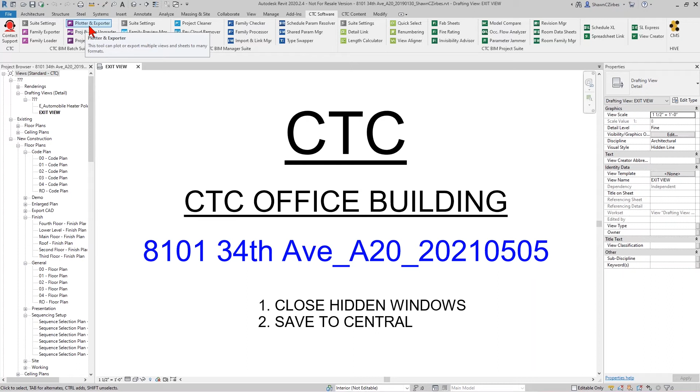With the Plotter and Exporter, when you click on it, I happen to be in a Revit project model where I want to be doing some printing. The Plotter Exporter is going to open and initialize. It'll provide me a list of all of the views, all of the sheets. Here's the sheets, a breakdown of all the views from the project. It also loads up the wildcard search library. Now, my wildcard search library is actually empty right now.

Oddly enough, over here to the right, I actually have wildcards in my export list that do not appear in my wildcard search library. And this is an important note. You do not have to distribute the wildcards themselves as individual files to your team if you're setting this up for batch use across your office. You can simply save a configured settings file, and those wildcards get saved within.

Now, I will go through the exercise of making a wildcard today so you can see how this is put together, how you can set this up, and why I set it up the way that I do. But you don't have to do that on everybody's computer or distribute them to everybody's computer.

That's an important note because it makes it a lot easier then to leverage these settings when you only have one configuration that you can share on your network. Okay. Within here, let me just start brand new. Let me start from scratch. So brand new settings, there's nothing configured over here at all. We're going to go completely from scratch.

We're going to talk about the interface of Plotter Exporter. On the left, this is asking me what it is I want to include in a print or an export of some sort. This is either views or sheets in my current project. The same list that's over here can appear right in through here, right? It doesn't exactly organize the same, but it's the same views, the same list. Or I can use the wildcards again, and we'll get to that in just a minute.

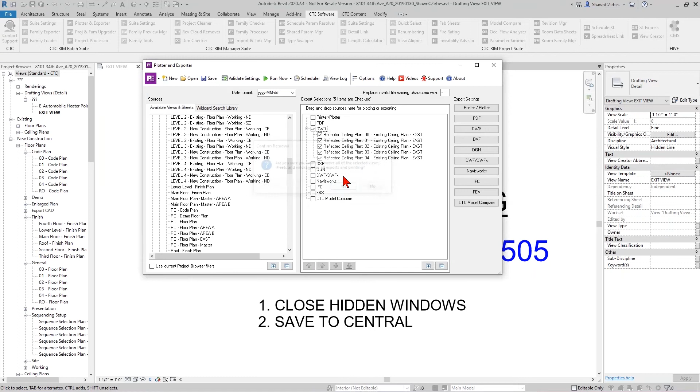So we're going to introduce the concept of wildcards now. Let me remove all of this because I don't want manual sheets in here, and I don't want manual views in here either. So I'm just going to remove all the selected items, and we're going to go over here to the wildcard search library. Wildcard searches are broken down very similar to how views and sheets are, based on view type or all views, based on sheet type or all sheets. Well, in this case, all sheets is basically what's there.

What I'm going to do is I'm going to start by creating a selection set of some specific views. I happen to know within my project standards that I have a view template that I use on a number of different views, and that view template has export CAD as a part of its name, a property that gets applied to my views. And I'm going to use that here to export any and all views that somehow relate to export CAD, because I might have 3D views, 2D views, elevations or RCPs or you name it. So I'm going to add to this list a new wildcard.

And for the search, I'm going to search for everything. And I'm going to give it some kind of a name. So the little asterisk here is everything. It's wildcard search. And that's typically what I do. I find everything. I don't really care about the view names or the sheet names. I just want everything that's specifically a view in this case. And I'm going to tell it what I want to call this. I'm going to say CAD, we'll capitalize that, exports.

You could put some other name on here if you wanted specific view types, but I'm going to look at all view types and all disciplines. If you did have the intent of using this specifically for just architecture views or just mechanical views or structure, you name it, you can do that. But I'm going to do all views of all view types. My view types would be things like 3D or floor plan or whatever. Okay. You can also choose to include views with this wildcard that specifically have certain revision cloud numbers associated to it, or maybe just the highest revision cloud.

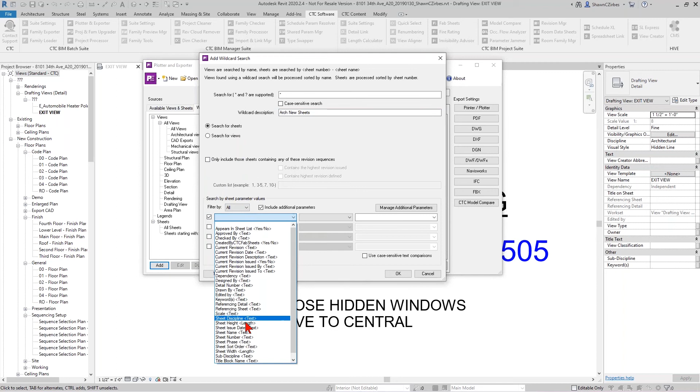Let's go find sheet discipline. Sheet discipline. Here we go. That's a custom parameter, again, that I added, and I fill that out for my sheets. And if that equals specifically architectural or architecture, when I test this, I should find that all of my architecture sheets have that discipline on there.

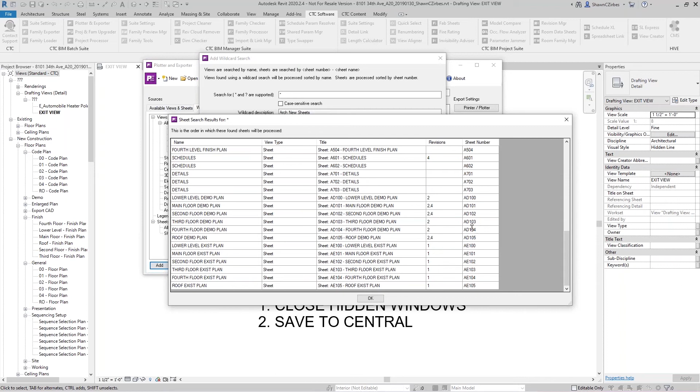Now, here's a problem. I have some demo sheets and some existing sheets as well, because this is an existing building with some demolition and then a bunch of new construction. And I don't want the architectural demo and architectural existing sheets in this set. Notice this is architectural new sheets specifically. So what I'm going to do is add another filter. I have a parameter called sheet phase. Again, another custom parameter that I've made in my project. You can certainly use your own for yours.

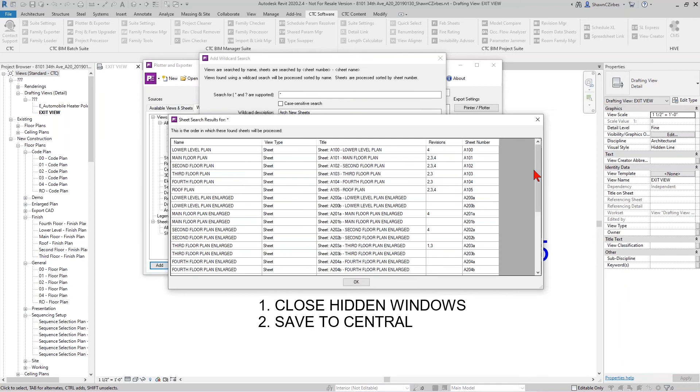I'm going to set this up to equals new, and then retest my export and just double check what's going on here. You'll notice this is just now the A sheets, just the A sheets. That's all I really wanted. And so I can okay this, and I can use this again over here for one of my exports. I could have a PDF dump of just the architectural new sheets if that's what I specifically wanted in my export.

Now the reason why I do that, Arch New Sheets, is because of the next little area. Inside of Plotter Exporter, you have some export settings over here. Each of the individual kinds of exports can be configured for exactly how you want them to export.

In the case of PDFs, I want to use, where is it here? I have to get my PDF printers real quick. Give this a minute to look for just PDF printers. Probably will have the native Windows PDF export. I'll have the CTC PDF writer. You might have Bluebeam or Adobe, you name it. Any PDF printer will be used here as long as the output file format of that printer is PDF. It'll show up in this list.

So I'm going to use the CTC PDF writer. I like how it prints. I'm also going to use print settings that exist in my project. Make sure that your print settings do relate to the printer that you've chosen, in this case, the PDF printer. And I'm going to go ahead and use architectural, I believe, D-size sheets in this project.

I can tell this exactly where to go. And I can use relative project directories if I need to. If these projects are stored on my network, I can certainly use that relative project folder to save this into a particular directory. So let me just browse to where this particular file is real quick here. The one that I have open is in my little demo folder.

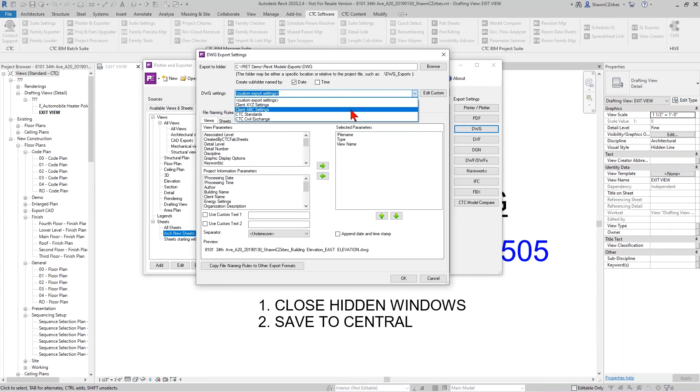Similarly, my DWG configuration, I can do something very similar. I'm going to browse out to my DWGs folder right here. Again, you can see I've done some exports in the past. Again, I want a dated subfolder. I can use specific DWG settings out of my project, or I can use custom export settings and edit those, similar to what I would do for Revit inherently. But if I've got certain settings that I want to use on a project or a couple of different projects, I can leverage that.

I also, again, have naming conventions. And for the views, that's the part that I really care about, since what I'm really exporting is views with CAD exports tagged. I don't really care about my sheets. Those are not going to DWG. Those are going to PDF. So I'm going to do just view naming conventions here. I'm going to pull everything out and then re-add stuff back in.

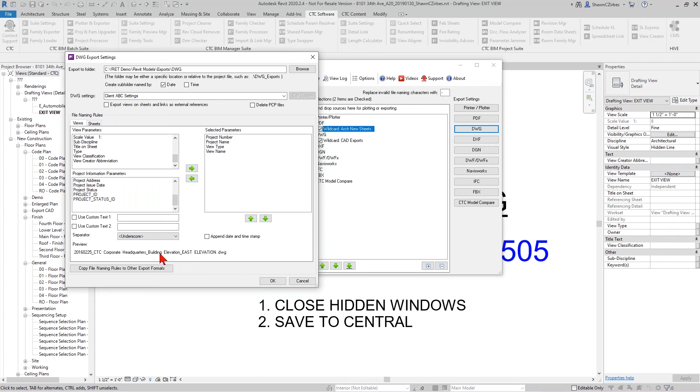So similar naming convention to my sheets. I'm going to use the project number, the project name, and perhaps from the view's properties, the view type. Yep, that's going to work. And I also want to use probably the view name. So project number, project name, view type, view name. You're going to see a little example down here. Building elevation, that's the east elevation. I could probably skip the actual view type and just use the name, but I like to include that. That's my personal choice. You can obviously set it up however you like.

And I have the option, if I want to here, of including the processing date. But since most of my consultants outside of my firm will be using these as X references, I probably don't want to include this because my name would change every single time. What I will do is keep it in a dated subfolder, as I mentioned, and that way I know what version it is and I can send that out. If you really want to put the date and or timestamp on, feel free. That's obviously a property that you can leverage.

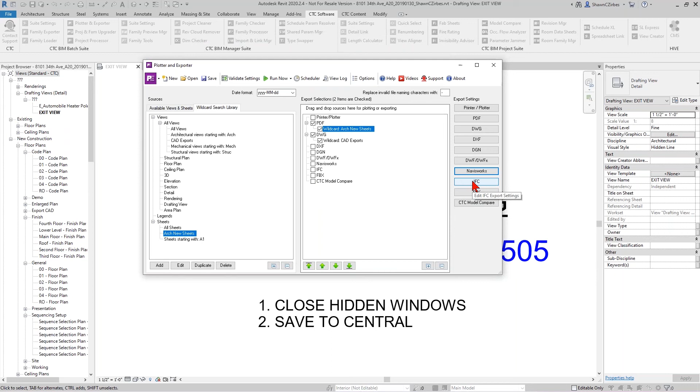So I've got my PDF and DWG settings. I'm not going to worry about any of the others. They're all very similar in how they're configured. The real difference is what do you want to export, how specifically do you want to name it, and what specific settings do you want. If I was doing Navisworks, I would have specific Navisworks settings here. If I'm doing IFC, it's IFC specific settings, right? So you have the settings that are related directly to that export type.

Ultimately, if this was all set up, I can hit run now, and it would run on my active project, my current project. Or if I had multiple projects open, I can select specific open projects and have it run on each of those. So in an on-demand method, I can just go ahead and run this whenever I need.

Now, I want to show you one more thing about this export setup. I'm going to open up some saved settings, which, by the way, you can do. You can save your settings out to whatever destination you want. In my case, I've got them in my little centralized location here for Plotter and Exporter. And I'm going to use my architectural structural print settings here.

So you can see I've got PDFs in the list, DWGs in the list. The CAD export views is very much the same as what you saw before. If I edit this one, you'll notice that it's view type export CAD, right? It's exactly the same settings we showed just a moment ago. And then my individual PDF exports here, you can see architectural existing, demo, new.

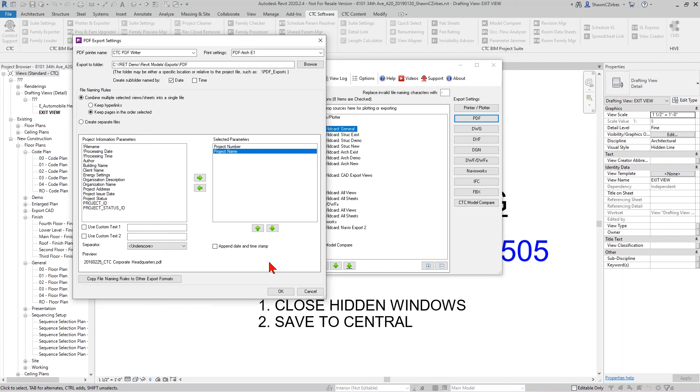I put them as 3 separate selections here, and structural exist, demo new, same thing. And then my general sheet is first. And that is because in my PDF, I want to combine this together, keeping the pages in the order that I've selected, which is exactly this order here. And within each of those selection sets, it'll alphanumerically sort those sheets, and I'm naming it by project number and project name. So it's exactly the same settings that you saw me configure just a moment ago.

So if I was to click Run Now, right now, on this active project, it would take it about probably, I don't know, 60 seconds to about 2 minutes to actually complete this full print, and it would dump the PDFs and the DWGs out, and I wouldn't have to babysit or watch that. And that's all well and good. But here's the deal. You don't want to watch that happen, so I'm not going to actually click Run Now right now. Maybe I'll do it later during the Q&A session. We can let this thing run. But that is certainly a way of running it.

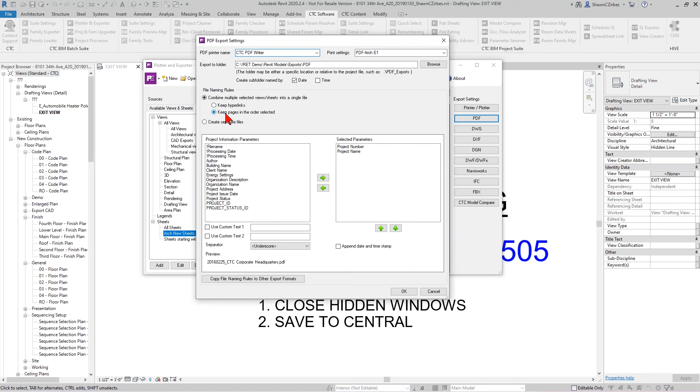The other way of running it is by using a scheduler. And this is where this tool becomes incredibly powerful. If every Friday I know that I want to print this for a collection of projects, I can set this up to do exactly that. With the scheduler, the one thing that you absolutely have to have is you have to have saved your settings someplace. In my case, I've got an architectural structural print set, and it will do exactly these settings and know what those export settings are supposed to be. I'm just going to resave this to make sure it's using exactly what I want. So it is, good. And that's just because I made a change quickly to the PDF settings. It was set to create separate files, and I wanted it to be in a single file with my pages in the right order.

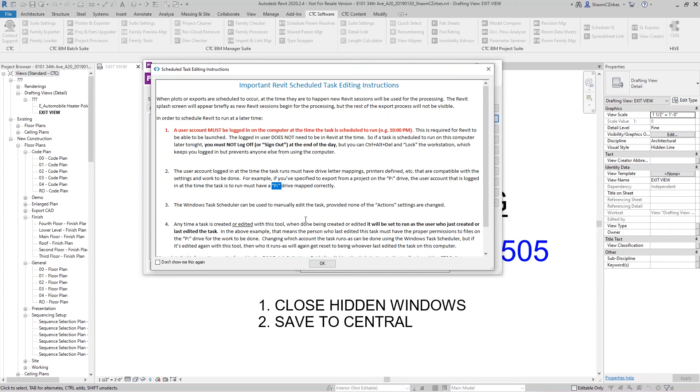So if I jump into Scheduler, there's a couple of other caveats to this. This must be run on a computer with Revit, and it must be logged in. The computer can be locked, but it must be logged in. So you don't sign out at the end of the day. The user that is logged in must have privileges and drive letter mappings and the printers defined from your settings file. That's kind of an important thing. So if you're using a P drive, for example, or an R drive, that must exist and the path of the models must be correct. And we're basically leveraging Windows Task Scheduler for this little step.

So I'm going to delete the one that's here right now, and we're going to set up a brand new one. Create a new one, a new print set. This scheduled task is going to be called Webinar Print or Webinar Export. And I'm going to put CTC at the beginning of that because I like to prefix things with my corporate initials so I know that I set this up. It's a CTC specific export for me. I can schedule this to run weekly, every Friday, perhaps. And maybe I want this to run at 6 p.m. I like using 24-hour time, so 1800 Central in this case.

If I was working in other time zones, I would need to make sure that I synchronize this to whatever the time zone is, since I'm running this on my computer, which currently is 12:22 Central time. So if I wanted this to run 6 o'clock Pacific, I'd probably put in here 1900. Sorry, Pacific, that'd be 8 o'clock, 20. This is using 24-hour time because that's my system settings. You can have yours set up however you like. It's going to start to run this then on Friday.

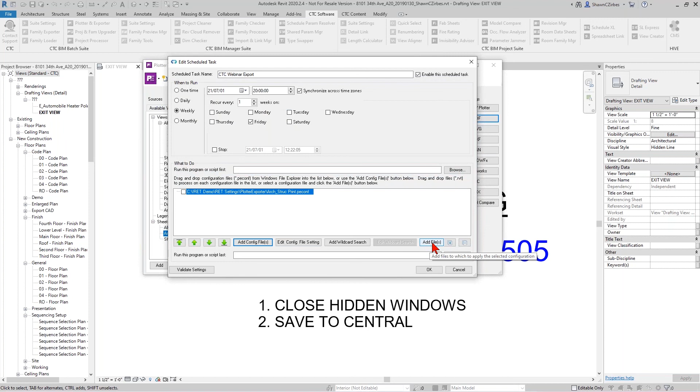And what I do is I add here a configuration file. That's that saved setting that I just saved out. Architectural structural print is the one that I was using a moment ago that had my settings in it that I wanted. So I'm going to add that to my list. I can click OK to that. And then I can add some files to that print set. So if I have, say, a couple of project models here at my fingertips and I want to add them in, I can do that.

And this tool is actually pretty powerful because it's actually version agnostic to a degree. So if I've got an architectural 2020 model and a 2021 model, and I want them both to use the same settings, these probably would be from different projects. In my case, I have a large demo set from a single project. But if you did have multiple versions at play here, that's okay. Because when this thing runs in an automated fashion, it will open up the correct version for the model. In this case, 2020 Revit or 2021 Revit.

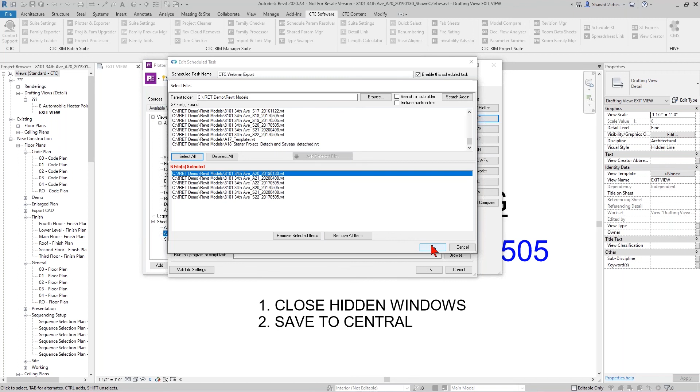And I can have other disciplines at play as well. So if I wanted my structural prints, since this is an architectural structural print set, I could choose those as well. Any of the versions that I wanted to have opened and printed, I can add them all to the list. I can click OK. And then on Friday at 8 p.m., this will begin with the first model. It will trigger Revit, in this case 2020, to open. It will run the print based on my settings in the background here, and then it will close that central model without saving. And then it will move on to the next one.

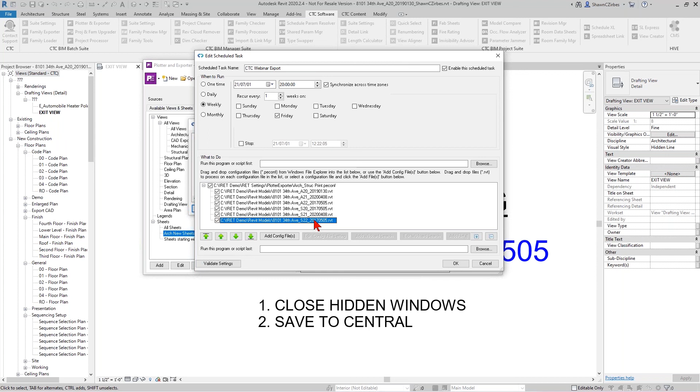It will open up Revit 2021. It will do the same thing. It will print that to its proper directory, and then 22, 20, 21, and 22 for structural. It will run each of those prints individually. So it's going to run those in whatever their series happens to be, and I'll be done. I can click OK. I can set this and forget it. I can just shut down Revit at the end of the day, lock my computer. Windows L is a good keyboard shortcut for that. Don't sign out. And this thing will run.

Important note, as of today, this will only run on projects that exist on your network. This will not currently run in an automated fashion with the scheduler on a project that exists in BIM 360 right now. We're working on that. That'll be coming soon. But for right now, it runs on projects that exist on your network. This will absolutely run and print projects on demand that exist on BIM 360.

So if you interactively, midday on a Friday, want to run a print, you can certainly use all these settings on a project that is hosted originally on BIM 360, but is open in your current Revit session, and you can run now these settings, grab lunch, and let it finish the prints. By the time you get back, it'll have done all the exports, all the prints that you asked for. So you can certainly run this on demand.

So in this little discussion today, we've talked about the general interface of Plotter Exporter, how to configure some wildcards and how to do view selections, how to add them to the export selections, modify the export settings, save and reopen those pre-configured settings. That should get you well on your way to leveraging the Plotter and Exporter tool itself.